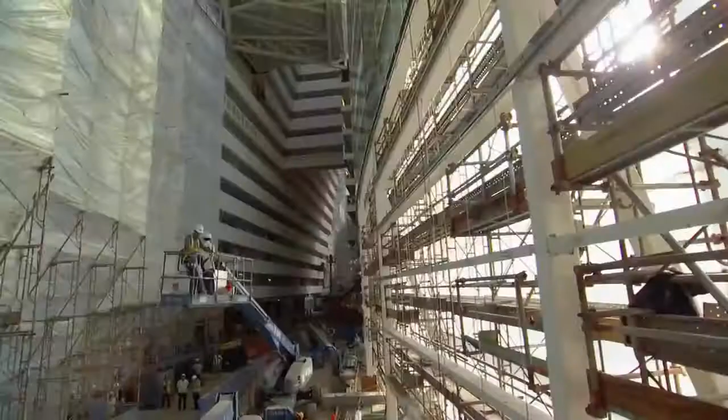Right now, I'm going to take you behind the scenes of one of the largest construction projects in all of Asia. Singapore is reinventing itself. This small island nation is attempting to finish one of the most audacious buildings on the planet. It's the country's first casino, 3 skyscrapers, covering 9 million square feet, and topped off by an engineering masterpiece.

The first ever Sky Park, longer than 3 football fields, with gardens, swimming pools, and restaurants, all higher than the Seattle Space Needle. We're actually in the pool right now. This is the view from the pool. Wow, it's pretty spectacular. That is amazing.

To finish it, crews must perform some of the highest and heaviest lifts ever attempted. You're putting a piece of steelwork the size of an aircraft carrier on top of 3 towers. Tackle one of the largest paint jobs on the planet. You would never do this in America. And erect one of the longest cantilevers in the world, 200 feet out over nothing. Oh my God, that's enormous.

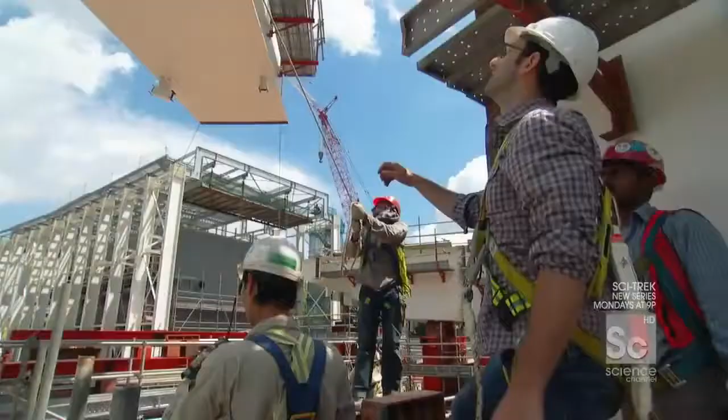I'm in Singapore, a tiny island nation with less than 5 million residents. In fact, the entire country is smaller than all of New York City. Located at the southern tip of the Malay Peninsula in Southeast Asia, the main island of Singapore is both a city and a country, one of the most densely populated in the world.

Culturally speaking, it's a somewhat strict and buttoned-up environment. Chewing gum is against the law. Insensitive behavior is punishable by fine. And if you're caught vandalizing a building, you quite literally get hit with a stick.

But despite this conservative cultural backdrop, Singapore is attempting to reinvent its image by doing something totally surprising. They're going to open a massive casino.

With no natural resources of its own, Singapore is risking $5.5 billion in hopes of cashing in on the gambling boom exploding across Asia.

It's a pretty significant gamble, because for Singapore, you've never had gaming before at this scale. You've never had a resort at this scale. You're taking a kind of a major leap. Yes, it's certainly a transformational project for Singapore, where you hope to actually not just double, but triple the tourism receipts. That's big.

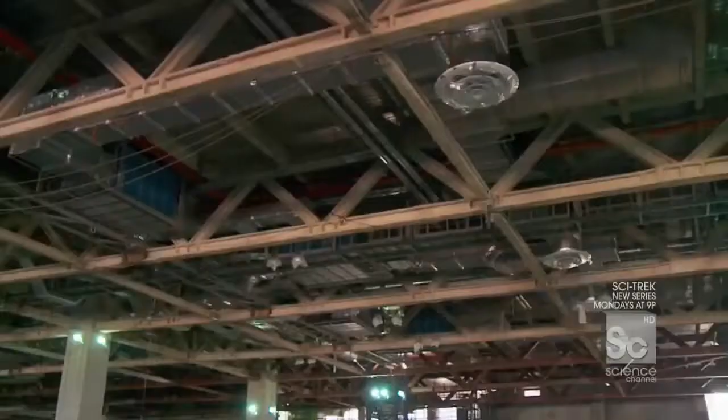The centerpiece of this giant transformation, the Marina Bay Sands, one of the biggest and most expensive casino complexes in the world. Unlike any hotel and casino ever built.

Rather than just being kind of a traditional hotel and casino that we might find in Vegas, instead we have a museum, you have theaters, you have retail, you have a casino, massive convention center, 3 incredible hotels, and all of that capped by the first ever Sky Park. That is absolutely right. The Sky Park on the very top will become the icon of Singapore, we think.

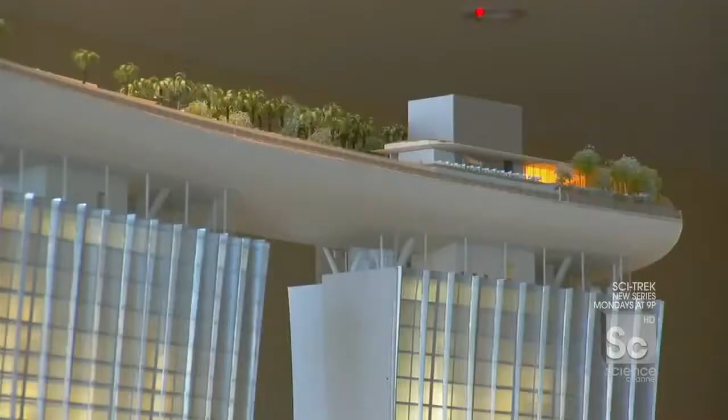In a move that has never been done before, world-famous architect Moshe Safdie put a park across the top of 3 massive skyscrapers. An 1,100-foot-long urban oasis with tropical gardens and one of the longest swimming pools on Earth, all of it perched 55 stories above the ground.

So, Brendan, how do you describe a Sky Park to people? I mean, it's just a fantastic structure. I've never seen anything like it. There's 3 55-story towers, and you're putting a piece of steelwork the size of an aircraft carrier on top of it. So it's quite a feat.

And there's a park up there. There is. Well, there's more than that. There's observation decks and swimming pools and restaurants and all sorts of things. So it'll be a little city in itself.

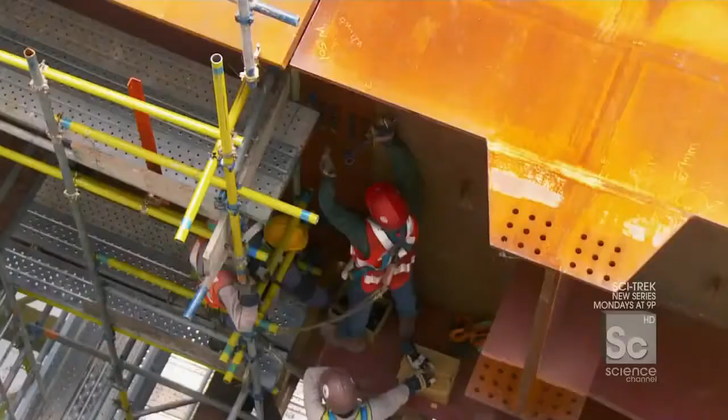The biggest challenge for builders: lifting 7,000 tons of steel, which is more than the main span of the Brooklyn Bridge, on top of 3 650-foot-tall buildings.

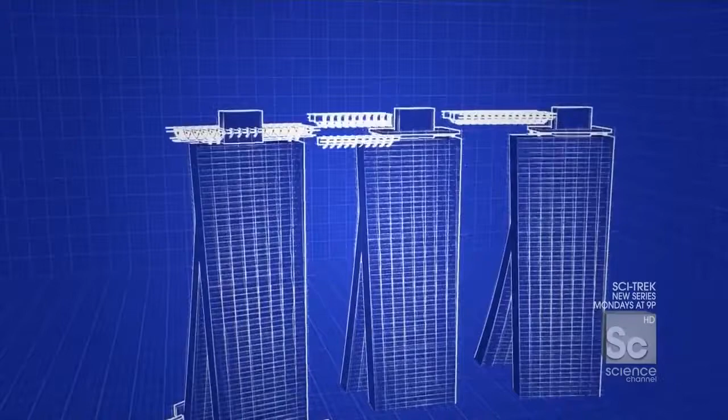To get it up there, the team divided the structure into 14 large but more manageable segments. 6 form the bridges connecting the towers, and the other 8 make up the observation deck, which sticks out 218 feet from the end.

And right now, crews are about to lift the second to last bridge segment, a massive 350-ton piece that will hang between towers 2 and 3.

It's a little after 7 p.m., and on most job sites, it'd be quitting time, right? Folks would be going home. But here in Singapore, we're about to begin one of the most critical lifts in the entire project.

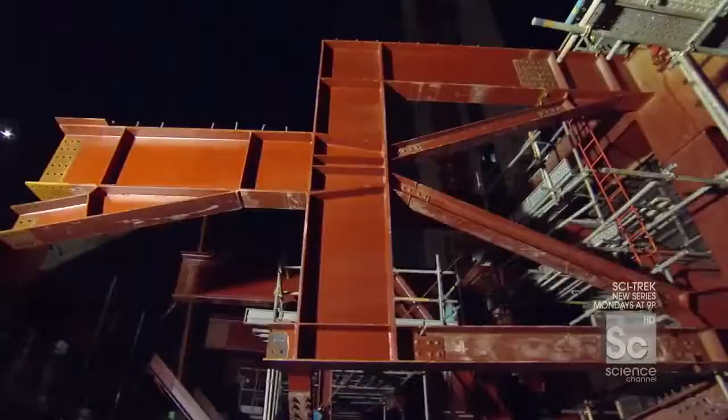That bridge segment right there, an over 350-ton chunk of steel, is about to get lifted up over 650 feet in the air.

This sounds crazy, right? We're actually taking a bridge, lifting it up, and putting it on top of 2 skyscrapers. This has never been done. You've got to be a little bit nervous to get this thing up. Oh, definitely. We have to get it right.

Lifting this piece will take some of the strongest hoisting cables ever designed. They get attached to the very top of the segment, 5 stories up.

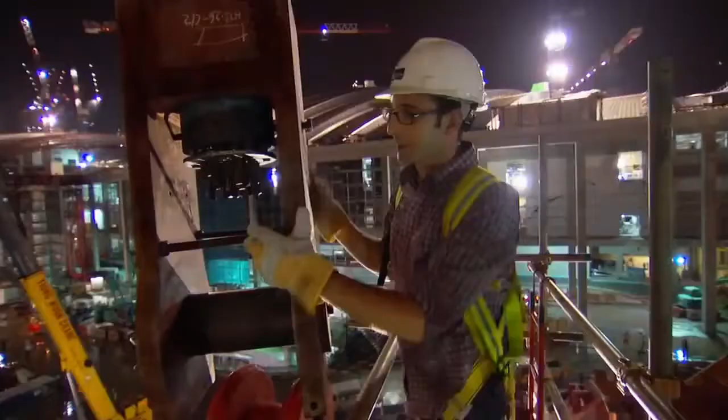Now, at long last, I'm on top of the whole bridge segment, and you really get a sense of its length, because it spans all the way between 2 full towers, over 150 feet long. This is what it's all about. This is the shackle coming down, over 600 feet up. Look at the amount of bound cables inside of this thing, just the density. There are 2 of these shackles, one on this side, one on that side. We're going to lift up over 350 tons of steel.

All right, call the man upstairs. An operator from the top of the Sky Park lowers the shackle down. There she comes, there it is, here it is.

960 millimeters. It has to line up within 1/10 of an inch for this 150-pound anchor pin to fit through. Oh no, I'm stuck. Push, fight, come on, shake it a little bit. Hammer! Give it to me. You ready? Here I come.

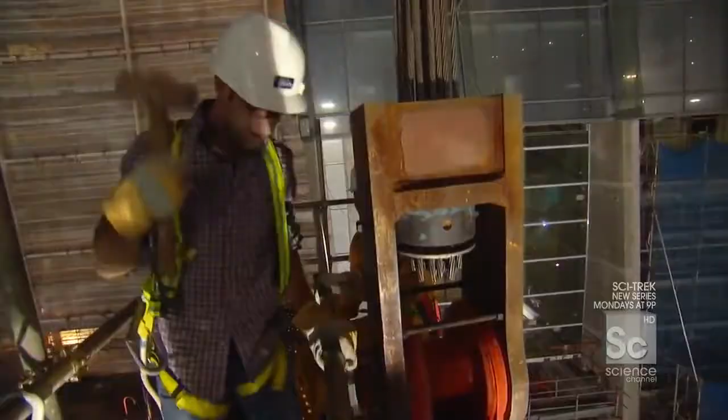Once the pins are pounded into place and the shackles are connected, there is one final step to make sure that the load is secure. Overnight, crews test the connections for 12 hours by hanging the segment just 4 inches above the support. If everything looks good, it is ready to go up.

Okay, she's floating, 4 inches off the ground. Ready for the lift? Yes.

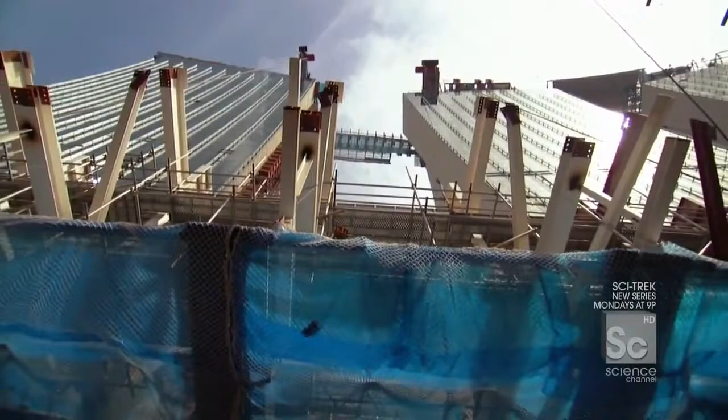How's the wind? If you can see it, it is swinging, and if it swings, it might hit the building. So when the lift begins, the concern is in a strong wind, like a pendulum, it could move and actually hit the building. It's that close to the building. It is very close. Because of the curvature of the towers, this piece must pass within 10 feet of 2 glass skyscrapers on its way up. Any wind over 5 miles per hour is enough to call off the lift.

So are we good? Are we ready? Yeah, good. So it's now okay to go.

Typically, crews would use tower cranes for heavy lifts, but this segment far exceeds their capacity. So instead, engineers are borrowing the technology from a different kind of construction: bridge building. Even the most powerful tower crane can lift about 20 tons. This thing weighs over 360 — not an option. So they went with something called a strand jack.

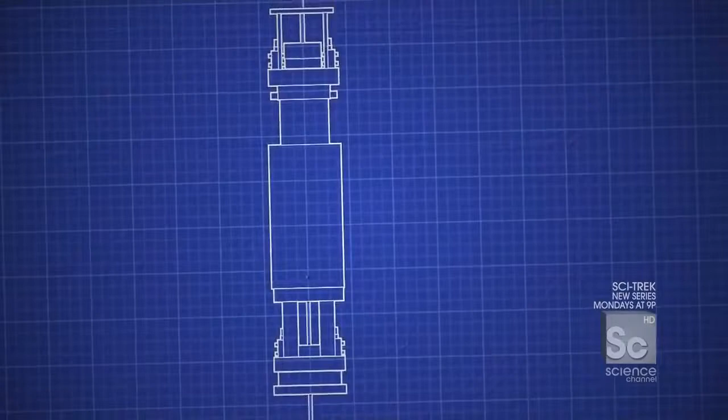To understand how it works, imagine 2 hands or clamps holding a rope. One hand locks the rope, the other brings the rope up, grabs the rope, goes back for more, brings up more rope, and so on. Strand jacks work on simple hydraulics. A bundle of 22 half-inch diameter cables passes through 2 clamps. The top clamp grips the strands and moves up almost 2 feet. Then the bottom clamp locks the cables in place while the top moves back down for the next pull-up.

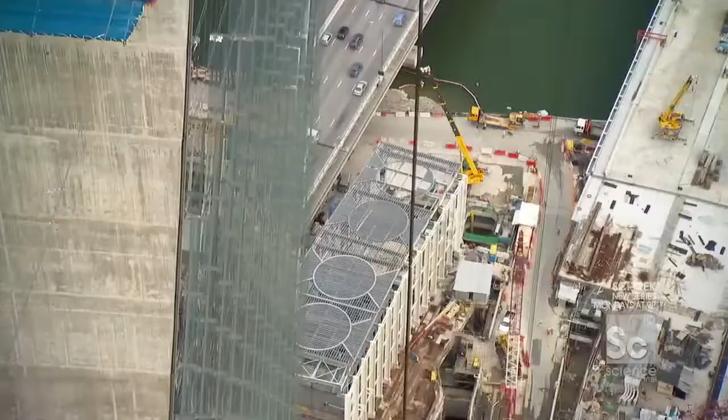It takes 2 enormous strand jacks to lift this segment, one on each tower. Combined, they could lift the Statue of Liberty. It's the first time this technology has been used to make lifts this heavy from the top of a skyscraper.

Tony? Danny. Welcome, Danny. Good to meet you. Good to meet you. Tony, where am I standing right now?

Well, you're on the Sky Park, so this is kind of where the action is. This is where the pool is — right where we are now is the second swimming pool. We're actually in the pool right now. This is the view from the pool. Oh my God, people will be able to swim out to the edge of the pool. And literally, there'll be no edge — it'll be an infinity edge looking out over Singapore. Wow, it's pretty spectacular. That is amazing.

And what's making all of this happen is this really nasty-looking beam. That's right — this enormous frame is supporting the strand jacking units. Now, can we actually head up top to the strand jack? Yeah, we can. Let's go this way.

The strand jack sits on a temporary support structure that extends 30 feet out from the side of the tower. So, Tony, where we're walking right now, we're actually leaving the skyscraper below us and now heading out. We've just walked off the edge of the building.

Beyond. So we're now standing perched out. There's no more skyscraper below us right now. There's no building below us.

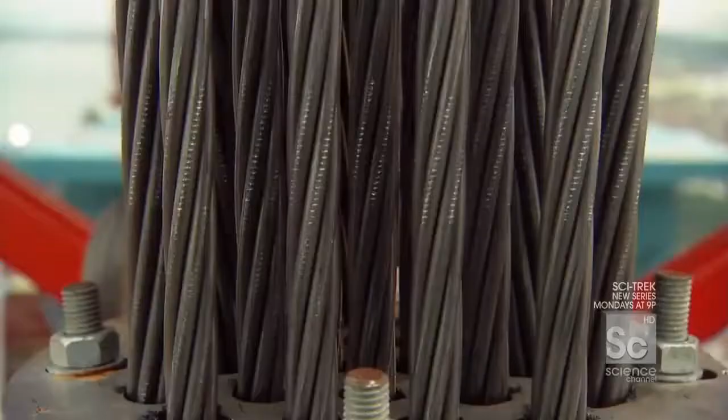It's awkward. It takes almost 30,000 feet of cables to raise the segment, enough to cross the width of Manhattan. And if any of them get tangled, workers cannot lower the piece back down. So one of the most critical jobs on the site falls to the cable manning crew here at the highest point of the Sky Park.

Okay, so I am now standing at the very top of the strand jack. And you know that because right here, this is it. This is the top of the cables. And what we're about to do, every 30 strokes, they stop everything, clamp the lift, and spray some lubricant inside to make sure everything moves real freely. Unfortunately, I'm getting tasked with that role right now, so what do you got, some WD-40 we're doing this with? Look at this guy. Why is this the most low-tech thing in the world?

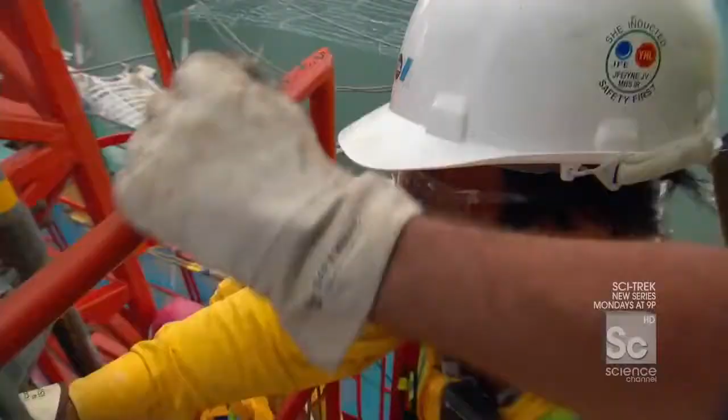Okay, so now what we've done is we've taken the collar off, we've lowered the jack down, now we've exposed the cables to give us good access for some good greasing. Okay, Romley, how do you grease it up? Spray and pull out. Put in, spray, pull out. Go in, spray, pull out.

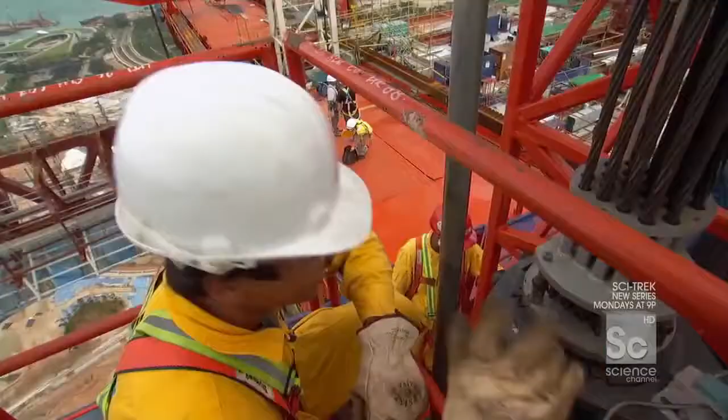You know, it's sort of humbling to have to climb up to this point, to have that behind you, to have to take a spray can like this, stick in, spray, pull out. Stick in, spray, pull out. Go in. These guys have to grease these cables once every hour for the entire night to get this segment up the final 500 feet to the very top of the Sky Park.

Coming up: a one-of-a-kind solution to fight Singapore's intense sun puts up a fight of its own. I'm gonna pull you right outside of the basket.

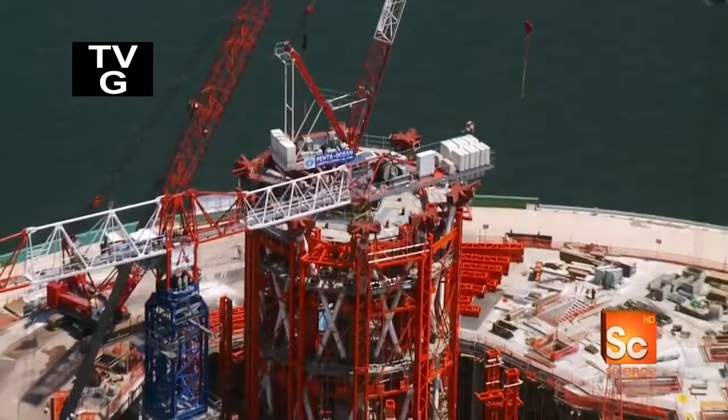Singapore is just 26 miles long. And with literally nowhere else to expand, this tiny island is increasing its footprint by actually filling in the sea, creating almost 1,000 acres of land on which to build an entirely new downtown.

So tell me something, if I was standing here 5 years ago, what would I have seen there? Well, 5 years ago, you wouldn't see the floating gallery, you wouldn't see the wheel, you wouldn't see Marina Bay Sands, neither would you see the financial center. So this is a radically different skyline in just 5 years' time.

Yes. Singapore's evolution involved 30 years of land reclamation, followed by 5 years of construction, all culminating with the Marina Bay Sands. So 5 years ago, this would have been called the old downtown of Singapore. Yeah. And now with the Marina Bay Sands completed, this becomes the new downtown. Yes, absolutely.

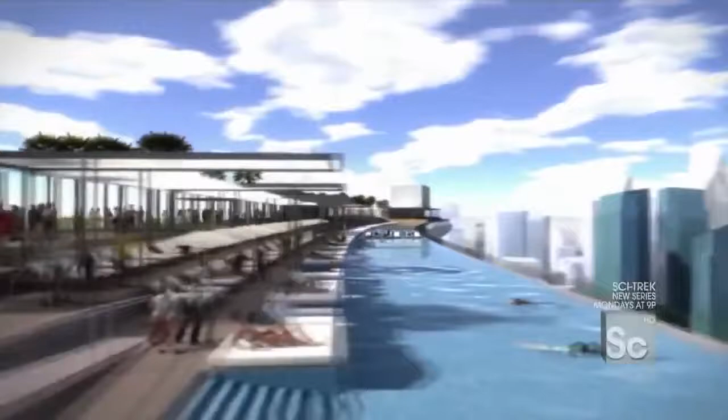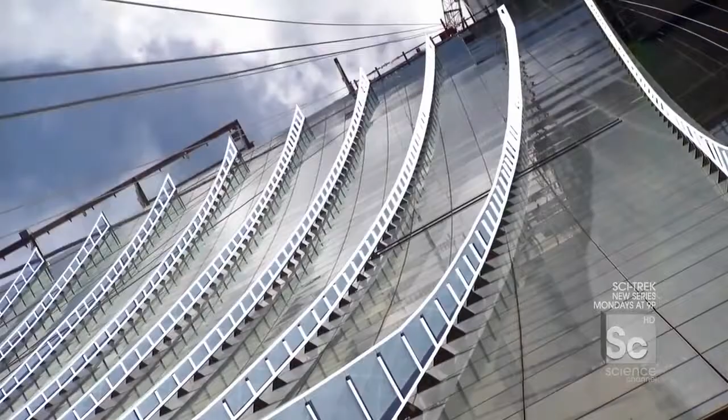The Marina Bay Sands' 3 hotel towers will offer guests phenomenal views of Singapore's new downtown. But they also had to be a stunning centerpiece for the city's redevelopment. So, to define their curved silhouette, the architect clad the tower facades with 1,900 glass fins, which also perform a key functional role for the building. The western face of the towers gets the most intense afternoon sun, so when the light hits the fins, they actually deflect the sun's rays, casting a shadow that reduces the heat on the hotel rooms by 20%, while still enabling clear views of the bay.

But this distinctive design feature is also one of the most difficult to install. I think today is gonna be one of those days where I go and do something that I kind of think I shouldn't do, but in the name of really understanding how it is they build this building, we're gonna do it anyway. I'm gonna take you in a gondola up the side of a building, almost 600 feet to install glass fins.

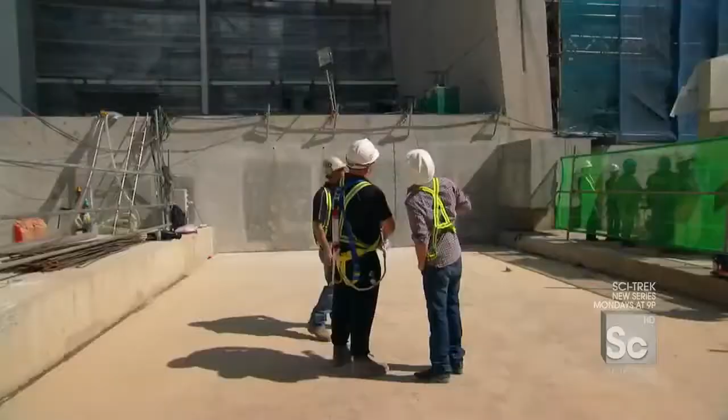And the guys who are going to help me do it are right here. Terry? Hi, Danny. Good to see you. David, how are you? Danny, good. Not bad. What are we up to, fellas? We're actually going up to the top. Basically, we're going to install the last fins to Tower 1. And these fins are actually hanging perpendicular from the facade of the building. That's correct.

Each fin is 10 feet tall and weighs 400 pounds. They're hung in straight vertical lines, protruding up to 4 feet from the side of the tower. Because the facade actually curves outward 5 degrees at the top, there would not be enough clearance for the Sky Park lift to pass by. So 12 fins in the upper corners of each tower were left off until now.

So this is it. We are closing up the curtain wall of Tower 1. Yes. Big milestone. Big milestone. All right. Take me over to my maker. Let's do this. Okay. No problem. Lead the way.

Terry's crew installed the fins from a 6-foot-long gondola hanging off the side of the building. You gotta be kidding me. It's basically the size of a bathtub, swinging from 2 sets of 650-foot-long cables tied to the tower.

Just gonna hang some glass with my boy Jay, 600 feet in the air. Right, man? Give me some skin. Buddy, we're gonna be great.

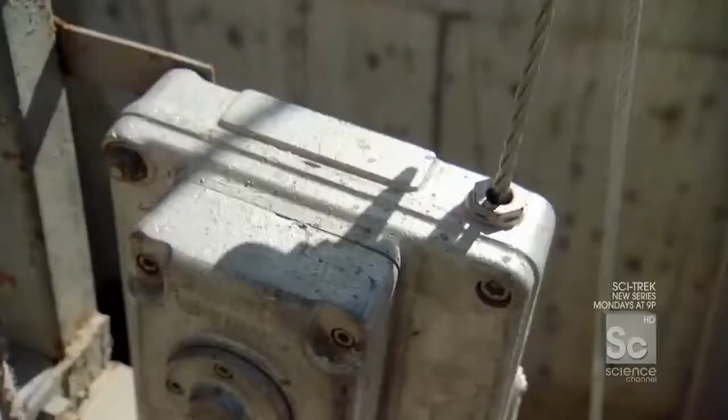Here we go. The gondola travels at just 0.2 miles per hour. Here I come, moving along, just moving along. So it'll take me more than half an hour to reach the top.

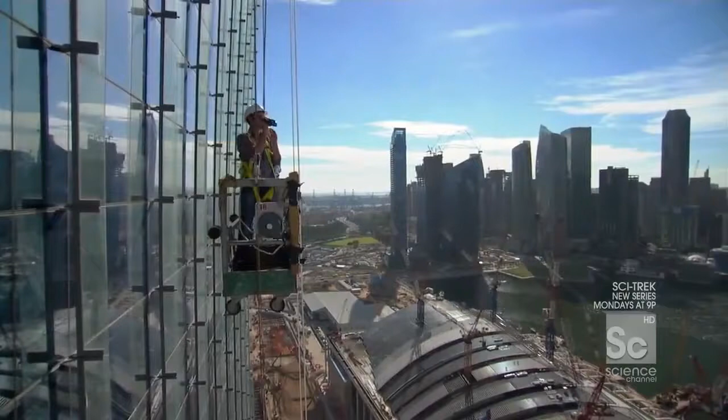Oh my God, this gondola looks like it was built by the Unabomber. I don't really feel like I give you exactly what's going on for me right now, so I want to give you just a little taste of what I'm seeing. There is a fantastic view of Singapore. There is Jay, my chatty friend. And there is not a good situation.

All right, we're almost near the top, and you can tell because the building is beginning to bend back on itself and get closer to me. Right there, check it out, we're about 80 feet from the top of the building, and you can see, if you look up, the missing glass panel.

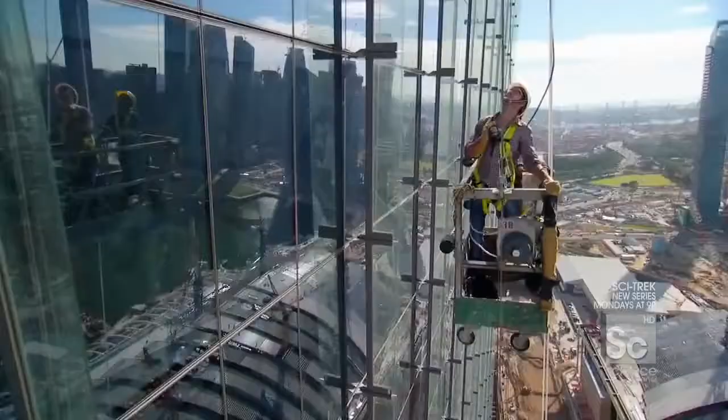As I approach the top of the skyscraper, they're prepping the glass. There she is. Oh, the wind is really moving up here. That looks safe. Hey, fellas! How are you? Nice weather, huh? This is something you don't see every day. I'm outside a skyscraper, and right here, right now, I am touching the top of the building. We are on top of the skyscraper.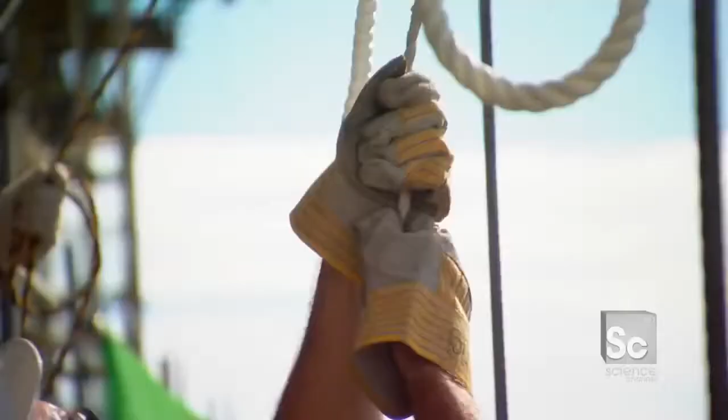All right, who's ready to install some fins? Each fin is a custom-built pane of solid glass. I've got the line, hang on. On a calm day, they are extremely difficult to manage.

The wind is blowing this thing out. Give me a hand. But on a day with even a light wind, the task is almost impossible. Hang on, you feel like it's gonna pull you right outside of the basket. Hang on, give me some help. I'm not kidding, every time you get a little gust of wind, I can feel my feet getting cold a little bit. There she is, slowing down.

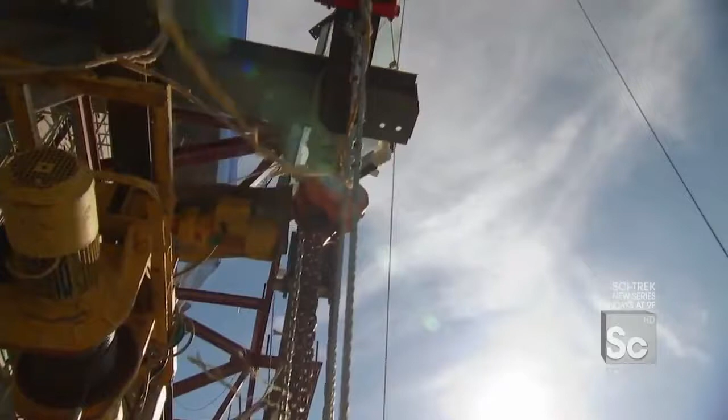It's basically like a big double laminated glass sail, and if the wind catches it, it moves. Okay, let it come down a little bit more. The fin can swing up to 20 feet while attached to the tower crane. Coming this way? Okay, watch out, someone help him! That's just too dangerous for the final installation.

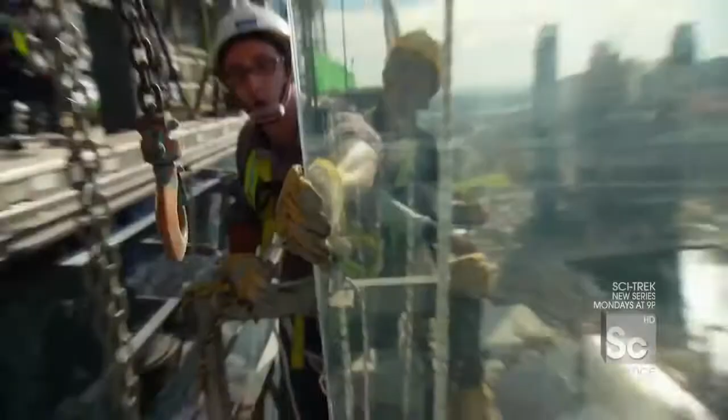So the team has to transfer it to a more precise chain block mid-air. Whoa, hold that side, please. All right, so this is it. What we're doing right now is essentially taking the load from the crane and transferring it to that chain block. Are we in? Okay, I think we're set.

This is another one of those moments in my life where I say to myself as an architect, did you really need the fins? Did you have to have fins? The building would have been fine, you know?

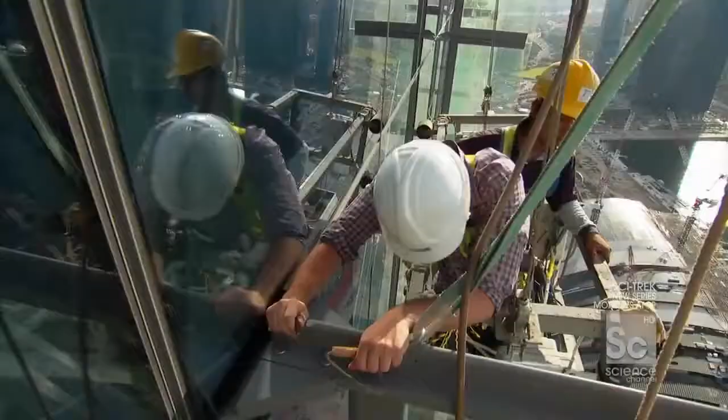Okay, gondola down. The fins are designed to clip into each other at the bottom. Need you now, Jay. But here, at the very top connection on the highest fin, oh boy, this is gonna be a nasty one, it gets locked to the building with bolts.

Okay, Jay. 4 bolts. Give me your thoughts. 1, 2, 3, 4, are we good? Okay, are we good? Come here, bring it in, I need some. Give me, come on, give me it, babe. I need some, there it is. Okay, that's right. Whew, 4 bolts, locked in, lined up.

We, Jay, are done. Can we go home? Home. Home, that much he understands. Let's get out of here.

Up next, building one of the longest and highest cantilevers in the world, jutting out more than 200 feet over nothing. Oh my God, that's enormous.

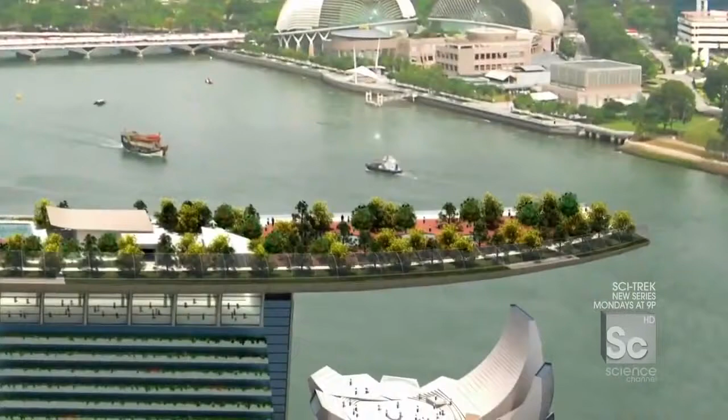Singapore's new Sky Park is the first of its kind, a steel structure longer than an aircraft carrier, on top of 3 skyscrapers taller than the Seattle Space Needle. On the northern end, the architect took this innovation one step further, creating the longest cantilevered observation deck in the world. It's the biggest and heaviest section of the Sky Park, and it hangs out 200 feet over thin air.

When it's done, the Sky Park will look like one 1,100-foot-long continuous element. But the reality is, it's made up of 2 very different structural conditions: bridges on one hand, and something called a cantilever on the other. Spanning between towers 1 and 2, and towers 2 and 3, are 2 bridges, basically acting like tabletops. The force goes from the bridge, transfers into the towers, and down shear walls into the foundation.

Now, the cantilever is a different story. A cantilever, by definition, is a load supported on only one side. So what you have here is a 218-foot-long span, almost like a diving board, perched out over nothing. Intuitively, that load wants to just twist off the building. So to keep it down, they've put not 1, but 2 700-ton backspans holding down the cantilever. The 2 backspans weigh as much as a fully loaded freight train.

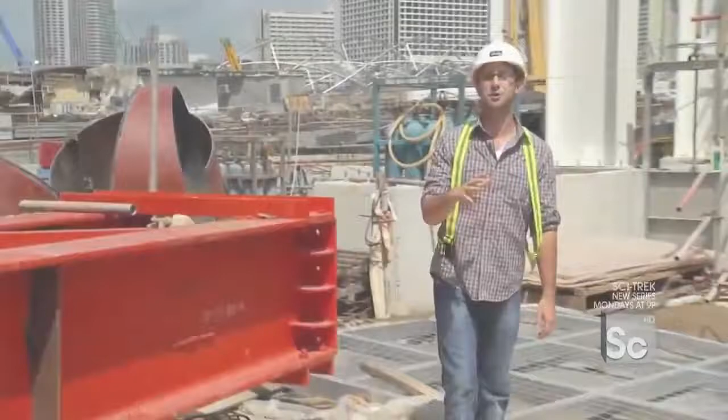That weight is critical to balancing out the cantilever, which will jut out longer than a 747 from the end of Tower 3. There are 860 tons of structural steel that make up the 218-foot-long enormous cantilever. It is so big that they actually assemble the entire unit here on the ground before sending it all the way up there.

The cantilever is just too big to be raised in one single lift. Instead, it's divided into 6 segments. Once they're 650 feet in the air, crews will have just 1 shot to fit them together. So before the segments can be lifted, they're assembled on the ground to be sure that each connection will fit perfectly.

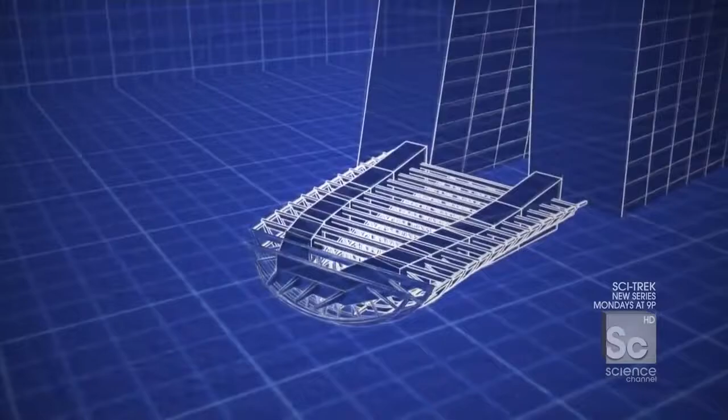These pieces behind me represent the very final pieces of the cantilever to be assembled here on the ground. Once we get this and this bolted onto that massive cantilever, the lifts can begin.

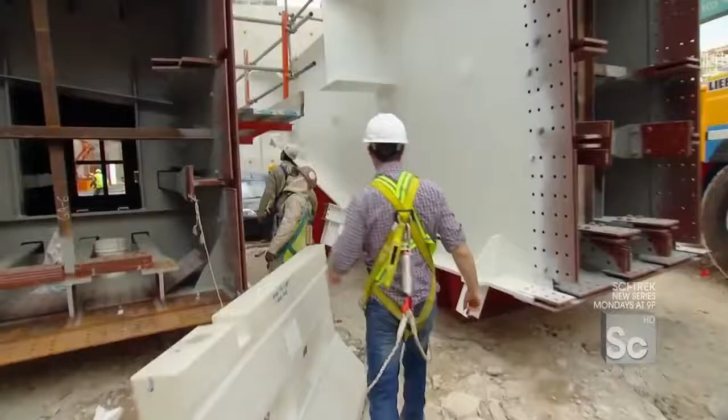The crane's now setting the shackles up. We're going to go on top of the piece to connect it. The piece we're attaching today is 12 feet tall and weighs 30 tons, as much as 2 Mack trucks. A crane will lift it over to the rest of the cantilever using 4 extra-large shackles.

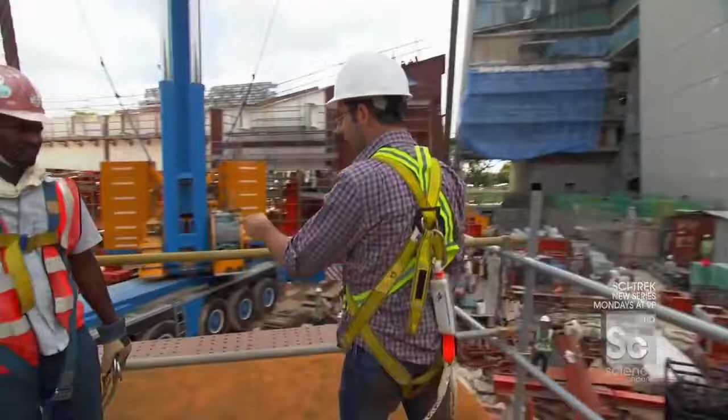Viram's now tightening up this shackle. Shackle number 1, 2, 3, and 4 are all connected. The next step is to take the piece I'm standing on, lift it up, and extend that cantilever another 50 feet.

You ready? Knuckles! All right. You ready, Knuckle Man? Knuckle Monster, you got it. Nux Magoo, come over here for that. Bang! We are ready to go. Okay, I'm ready.

What they've done is put a bit of tension in the line, lift the piece just off the ground to make sure the shackles look right, and confirm where the center of gravity is. Are we good? Are we ready? Yeah, all right, let's go. She's off, out of our hands. Now the crane's got her. He's going to swing her all the way around this way.

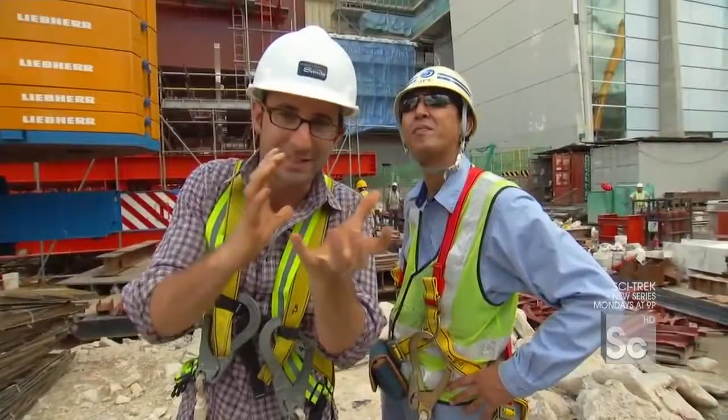What's really worth noting is as you look at this massive floating piece of steel, it's not but a small fraction of the entire cantilever that's going up there. Even with 1.5 million pounds of steel, this cantilever will still be susceptible to the problem facing all structures: movement.

All buildings, all bridges, even all cantilevers have a natural frequency, meaning they move ever so slightly. If the movement of wind, or even the movement of people, starts to align with that building's movement, it can combine and literally shake a building. So when the engineers were designing the cantilever, they had to be concerned with not just how many people stood on the edge, but also how they were moving.

This cantilever has been designed to withstand wind and earthquakes, but its most dangerous threat could come at the hands of a DJ. Yeah, it's thousands of tons of structure up there, so you and me jumping about, it's not going to do very much. But if you get 100 or 200 people all jumping up and down at the same frequency, it can actually excite the cantilever and you start to feel it.

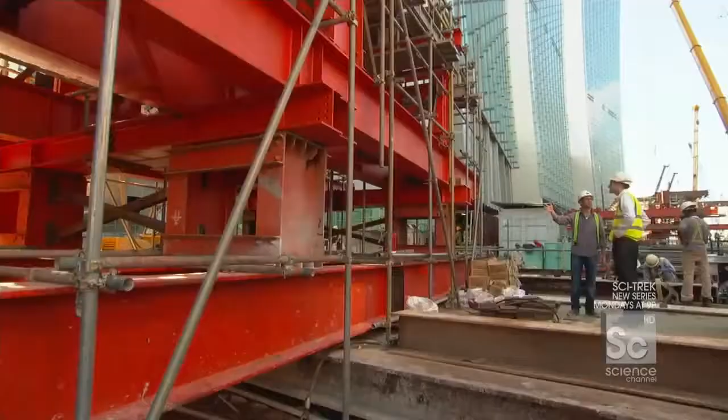It would take hundreds of people dancing to the exact same motion, like the Macarena. And believe it or not, our dynamics engineers have iPods with thousands of songs in them that have the frequencies of all these songs. So once we find out what the frequency is, in theory, you can say you can dance the Macarena, but you can't dance the bus stop.

That can't be true. Is that true? Yeah, that's right. So you're telling me some engineer is doing intense load calculations and figuring out that this thing can take the electric slide, but it cannot take the achy breaky heart? And they know that in advance, and it's been designed for. More or less, yeah. Imagine the party's going great, a big wedding, and all of a sudden someone puts on the Macarena and it's like, no!

Now that the piece has made its way over to the rest of the cantilever, the next major challenge is lining this giant segment up for attachment. The piece is now literally sitting right on top of my head. Just imagine, on top of this incredible long piece of steel will soon be a garden, a pool, and a dance party.

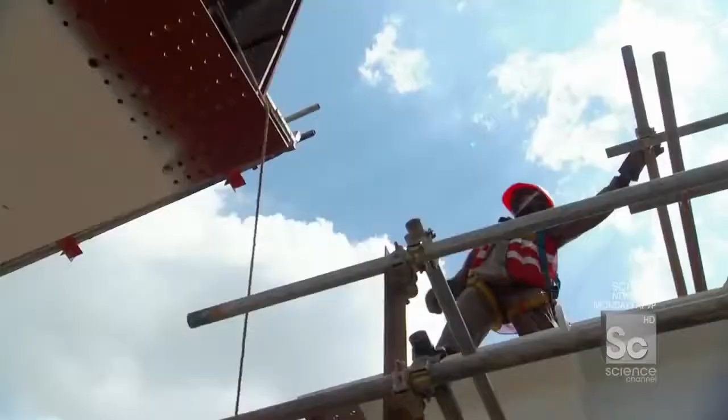Slowly got it down. Something incredible about lifts like these is that the first 99% happens almost instantly, and now it gets down to the details—pushing it, pulling it a matter of inches, to get all these holes lined up, to get the bolts in, and take the load off the crane.

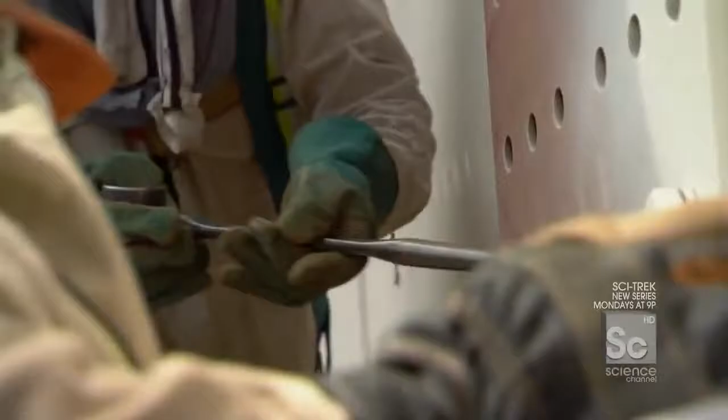Once the piece is in place, the crews have to line up all 1,500 bolt holes. There are so many bolt holes. They'll connect about a third of them here on the ground to make sure everything fits together before liftoff, because there are no second chances once this piece is airborne. So this is how one fits into the next piece right here—you have these two plates on top, and they're sliding over the previous cantilever piece.

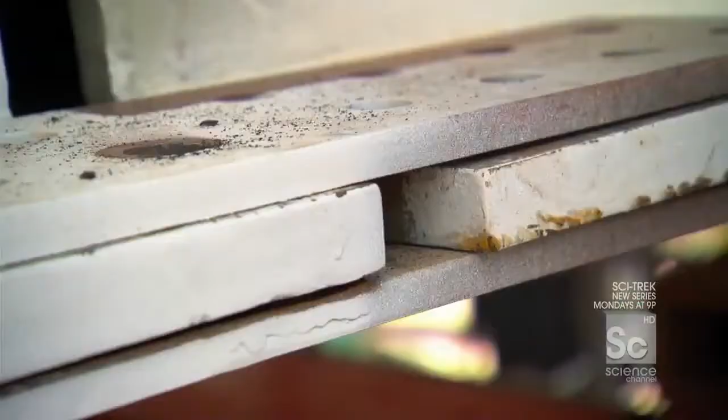Here it is, it's coming in, it's coming in. Once she's there, we'll put this pin in to lock the piece together so we can release the crane and move on. About 2 inches. Just about there, just about there. Okay? Yeah, use the hammer. The pin secures this new piece to the rest of the cantilever so bolting can begin.

Man, I never do that. Usually I break a finger and knock some steel off the thing and almost break the hammer most of the time. I knocked the crap out of that thing.

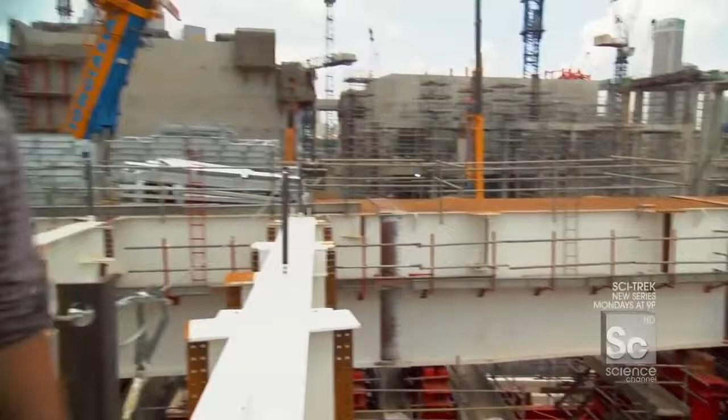As you can see, the piece is in its final location. Now from where I'm standing, I think you can really get what this thing is—an 860-ton, 218-foot-long steel diving board that's going to be perched out over 600 feet in the air.

And coming up, a hotel like no other, with a lobby bigger than a cruise ship wrapped in glass. This is probably one of the most spectacular corridors I've ever seen.

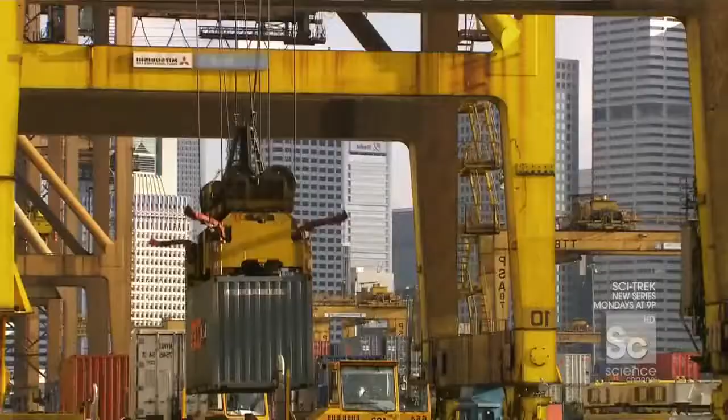Singapore is the gateway to Southeast Asia, and for the past century its economy has depended on its location as one of the world's busiest shipping ports. But this city is in the midst of a makeover. When the Marina Bay Sands opens later this year, Singapore will instantly become one of the largest gaming markets in the world, putting it in the same league as Las Vegas, Atlantic City, and Macau.

When Macau opened their casinos, they looked to the past for inspiration—you have the Venetian in Las Vegas, you have the Venetian in Macau, a carbon copy, only bigger. But here in Singapore, a country so focused on image, they didn't want to mimic what came before; instead, they're trying to literally reinvent the idea of a hotel casino. The difference comes down to design. The typical casino model involves a giant gaming floor with a flashy attraction out front and a hotel connected in the back. But with the Marina Bay Sands, the architect separated the hotel from the casino and relocated the attraction on top in the form of a sky park.

From my perspective, when I think of a hotel and casino, I think of a ginormous casino, a tall hotel in the back, and basically not being able to check in and go to my room without passing a blackjack table or a slot machine. This doesn't follow that model. Singapore has a very particular vision as to how they want the gaming component to work. What we built here was not something that was casino focused, it was all of this. So the casino is part of something far grander. Key to making that happen is not just building a set of normal, typical expected structures, but instead to do something like that.

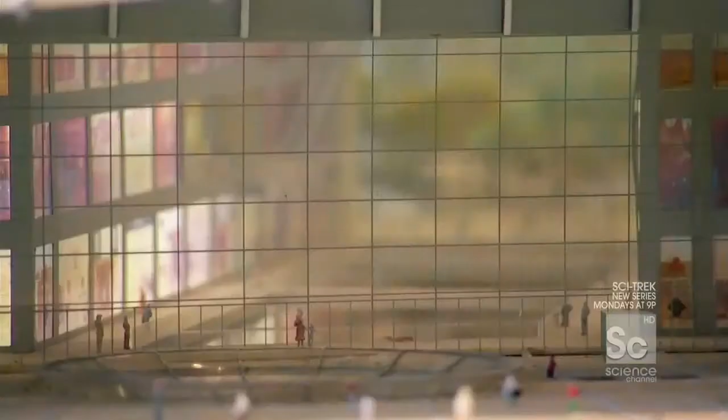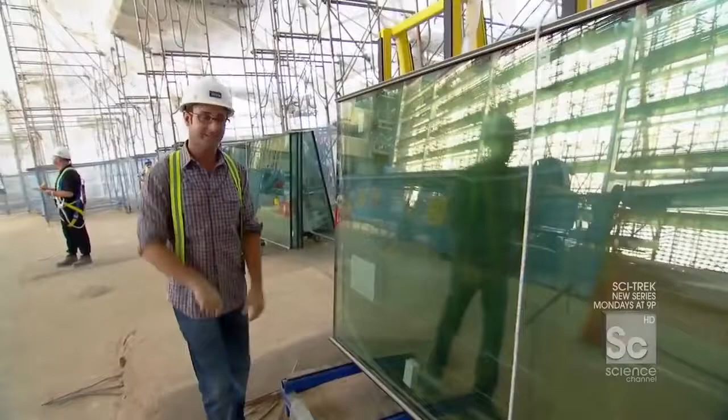This revolutionary design carries over to the hotel towers themselves. To create a hotel lobby like nothing before, the architect split each building apart for the bottom floors, creating one long tapered space linking the three separate towers together. The three hotel towers are all connected by one long continuous atrium, covered in glass, with massive 9-foot-long panels being installed. 3,500 individual panels will hang throughout the atrium, transforming this space into one 850-foot-long tube of daylight.

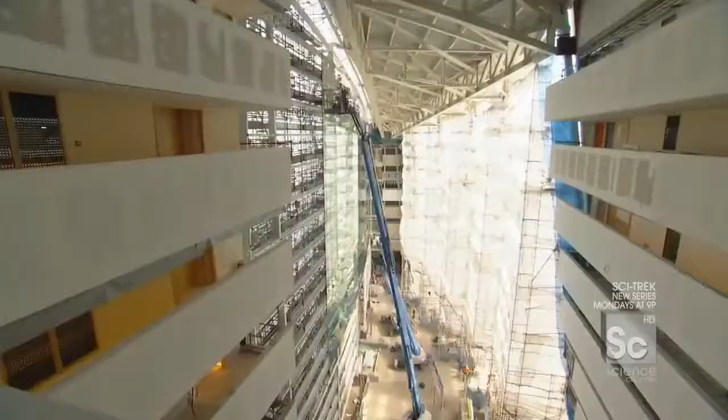So Terry, once the scaffolding comes down behind that glass, this whole chamber is going to be just awash in light. Yes, that's correct. And these spaces literally link all three hotel towers and let you look from one end of the building all the way down to the far end. So this is more than just a connective hallway from one hotel to the next. It's not just a corridor. No, and if it is, it's probably one of the most spectacular corridors I've ever seen.

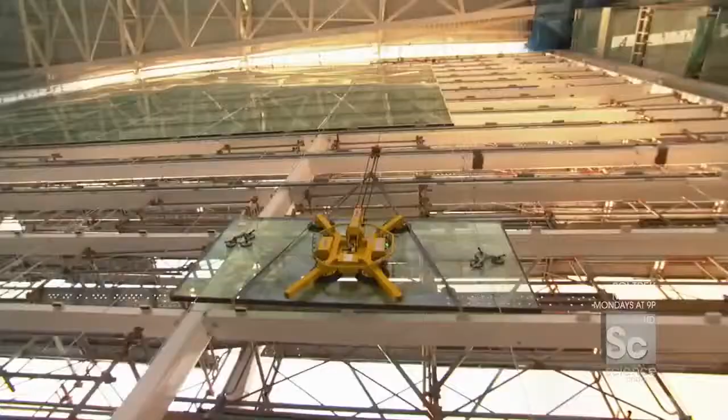Correct. The atrium glass is a key part of the tower design, but it also plays an important functional role in sealing up the building. With hotel guests arriving in just 6 months, the delicate job of hanging all that glass needs to happen quickly. Why is it so important to get the glass on the atrium and button up the facade? The vital bit is we have to make the building watertight as quickly as possible to enable all the final finishes to commence on the inside. So all the sheetrocking, carpeting, wallpaper, painting, that sort of stuff can't happen if moisture can still penetrate the building.

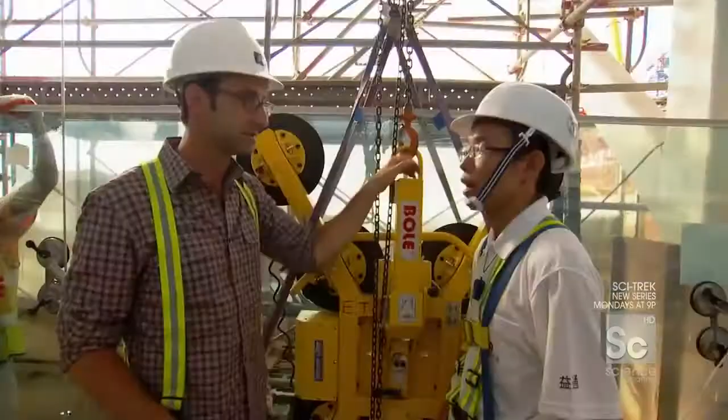Let's do it, Wy. We're installing the 3rd highest panel in this section of the atrium, more than 100 feet from the ground. Safety harness? I want you to be safe the whole time. In addition to Wy and me, it'll take 10 other workers to install this 550-pound panel.

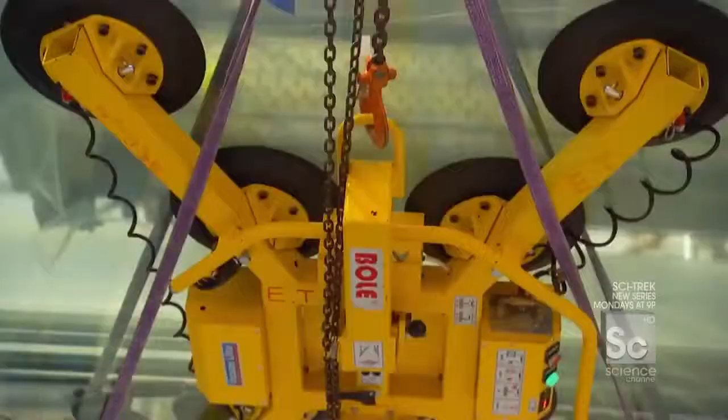The crew on the ground applies suction cups to the glass and then sends it up on an electric hoist to meet the crew in the air. Here it comes, check it out. And waiting for me, hello my brothers! You guys ready to rock and roll with myself and Wy? The big team, this is it. This is the Singapore Glass Stallions. All right, here it comes. It's a big piece of glass, huh?

Wy, yes. What are we doing, what's the first step? The first step is we need to take off the handle. So I'll take off that side, you take off that side? Yeah, take off only the handle, turn only. All right, I don't want to drop it though. Don't want to drop it. Okay.

The panel is supported by a backup system of smaller suction cups to help guide the piece on its way.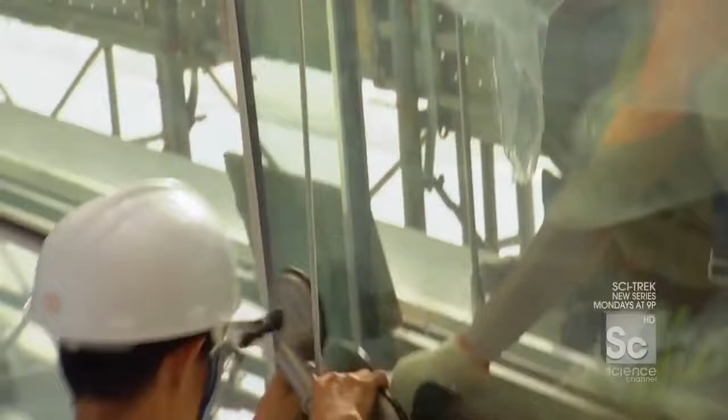Okay? Yeah, okay guys. It's okay, let go? No, it's too scary. I'm not gonna do it.

Okay, I did it. And just like the glass fins outside of the towers, we'll finish maneuvering this panel into place with the chain block. The chain block has lifted the glass panel to just about the height of the previous panel.

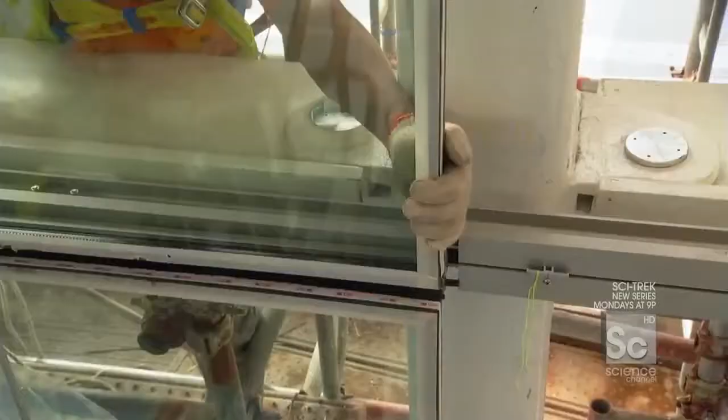So the next step is to push it in and get it locked into place on the brackets. The interior work for the hotel cannot get started until all the atrium glass is hung and the lobby is watertight.

To speed up that process, 20 attachment brackets come pre-installed on the atrium wall frame. They sit horizontally so the glass can slide into place, and then we'll turn them vertically to lock the panel to the building.

Do I need the screwdriver? No, you use the power tools. I'm old school, why, power tools. Make sure all the pressure bars are tight because the hand power is not standard. You haven't seen my hand power, why. Tight, yo. Check it, why, you don't trust me, check it. You have a look, that's good stuff.

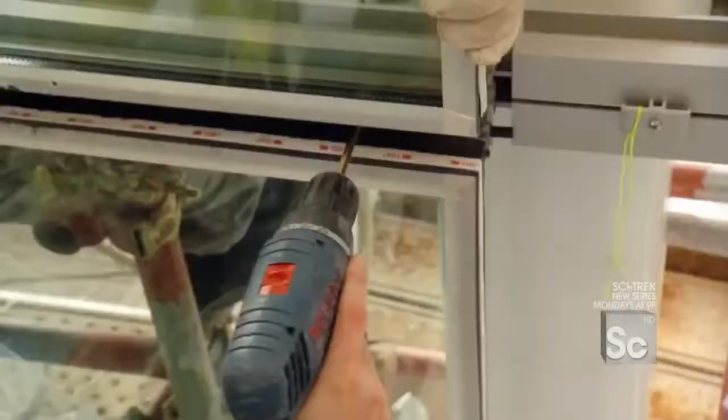All right, so all 4 sides are locked into place, and this glass panel is now fully supported by the building.

So therefore, I'm pulling the plug. Suction is coming off. 3, 2, 1. Okay, all right, very nice.

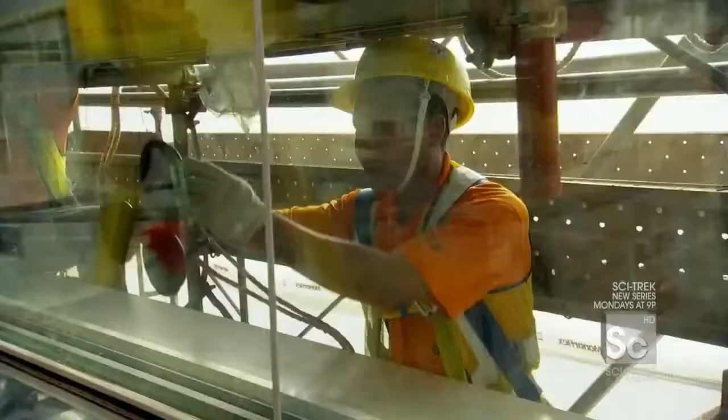Look at that, nice huh? Very nice. He's from Malaysia. Yeah, and his team does this 25 times a day. Best partner.

And in just 6 months' time, this entire atrium will be covered in glass and shimmering with natural daylight.

Okay, it's you and me. Go home, now go home. And by go home, I mean hang glass the rest of the day.

Up next, racing to finish one of the largest paint jobs in the world. We're gonna use a brush. Yeah, this brush, this brush.

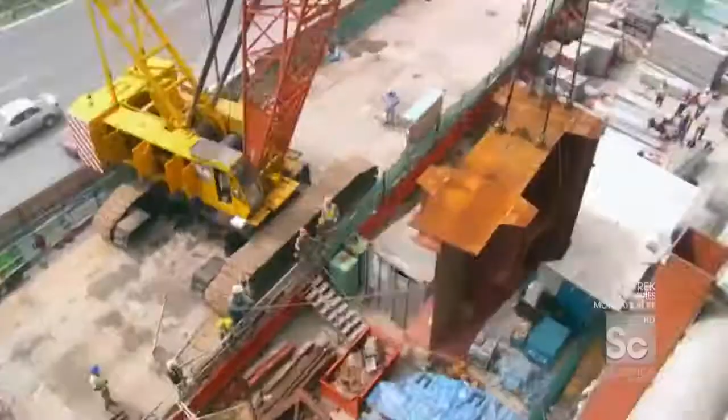After 30 years, Singapore's ambitious downtown redevelopment is nearly complete. Its crown jewel, the $5.5 billion Marina Bay Sands, is due to open in just 6 months, and crews are racing to complete the hotel's complex facade. The glass on the face of the towers is complete, but on the side walls, the concrete remains exposed. So to finish those walls on time, there's another massive job ahead.

When you clad the outside of a skyscraper, typically you cover it in maybe some stone veneer, maybe some glass, or maybe some metal paneling. What you don't do is you don't paint it, right? Because if you've ever painted a fence, every couple of years you have to repaint that fence. But here in Singapore, they're so focused on things being clean, so focused on the immaculate maintenance, they're willing to actually paint their buildings. So today, I'm going to do something that you would never see on an American construction site. I'm going to paint a skyscraper.

Crews will have to paint an area about the size of Mount Rushmore. Muti, I'm Danny. This is going to be one of the single largest paint jobs ever attempted.

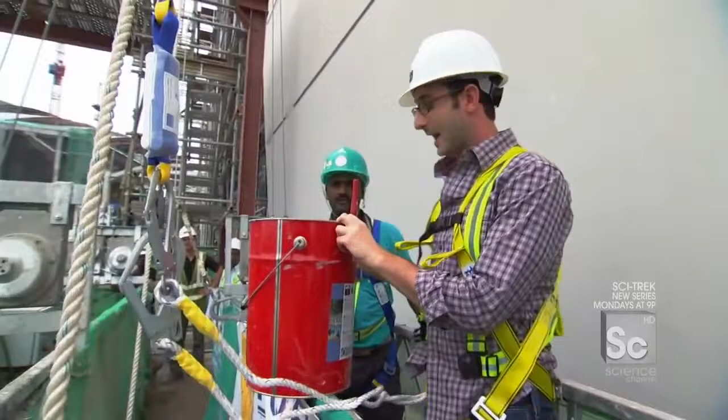So I've got a bucket of paint, and in order to apply the sophisticated skim coat with the technology we're going to use a paintbrush. Really, Muti? Yeah, this brush. It's a small brush, yeah? Yeah, small brush, one small brush.

Right, and obviously you couldn't do a skyscraper with that little brush, that'd be crazy. So instead, I have a roller, which ought to really expedite the process. Painting fast. All right, well what more do you need? Muti, yeah, away we go. Okay.

This wall faces the country's main highway, connecting the airport to downtown. So, Muti, you're okay? Heights, no problem? No problem, no problem. And on opening day, with all eyes on Singapore, it's gotta look good.

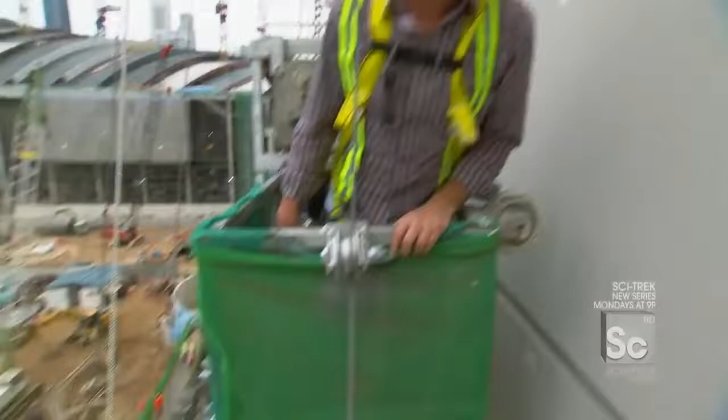Yeah, okay, so welcome to House Painting 101, Skyscraper Edition. We're about 200 or so feet in the air. We've reached our cruising altitude in a super, super robust and technologically sophisticated gondola system. And what we have to do is fix this, because this wall is a mess, right? Little holes that they've patched and filled. We have to have one smooth surface ready to be seen by all of Singapore.

Muti, start with the dark gray first, huh? Okay, first. I'm gonna paint within the lines here.

The dark gray lines mark each floor of the tower, so you can still see the floor-to-floor separation from afar, giving a sense of scale to this massive surface.

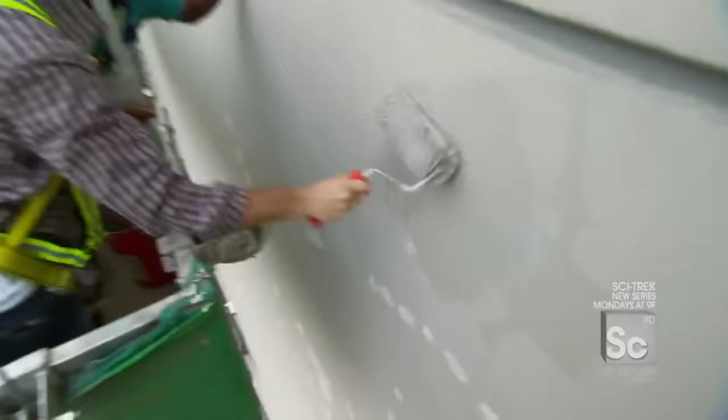Okay, so now that the gray line has been deepened and darkened, we're gonna start painting the building. Nice and gray. I like that Moody's looking over like I'm touching up the top of the Sistine Chapel or something. Moody, how's it look? Does it look good? Yeah, very nice, very nice. Good. Very nice, very nice.

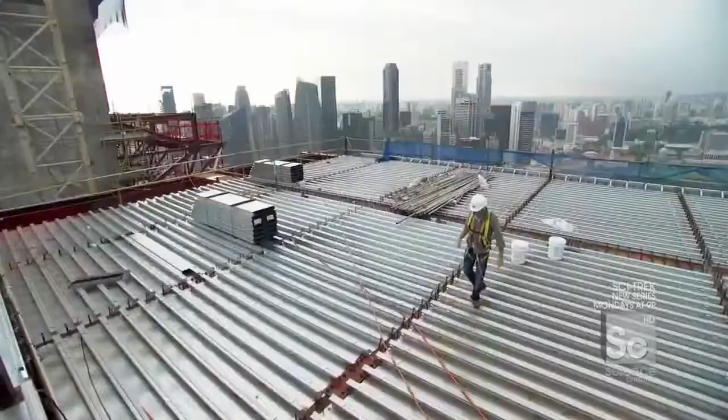But this is going to be a sprint to the finish, because crews up at the top of the Sky Park have only 6 months left to turn this mess of steel into the world's longest elevated pool deck. This is it. This will be the pool deck, and that will be the pool.

But there's a problem. I mean, there's a pretty big problem. You go on vacation, you come to the Sky Park, you see this amazing view of Singapore, and then you fall through a hole to your death. It's not good. Not good fun on the vacation.

So Wilson and I are going to cover it with this aluminum decking. Cover the holes? Let's cover the holes, my friend. We're filling in the bridge segments between towers 1 and 2, more than 650 feet up. And there is literally nothing below us but the decking we're about to lay.

Oh, I just got that thing. I just looked down and I saw a car, and it was so little, and my body was like, wait a minute, what are you doing up there?

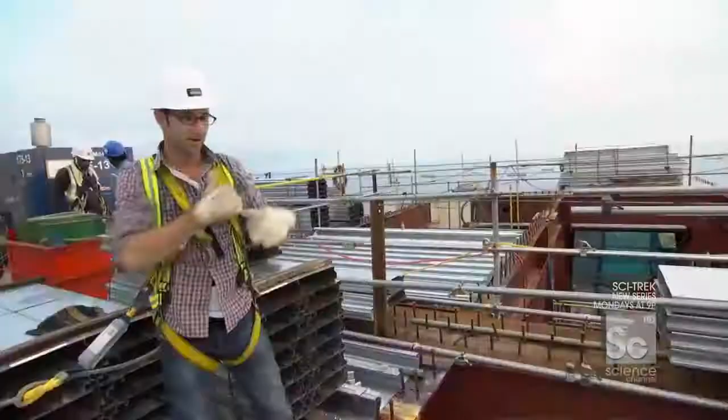All right, Wilson, how do we begin? Step 1? Okay, you ready? 1, 2, 3. Okay, and slot in. Pull back, pull back. Good. Put the clip on. Nice. Wilson, next piece, plugging up the hole. Dear God. Okay, letting go.

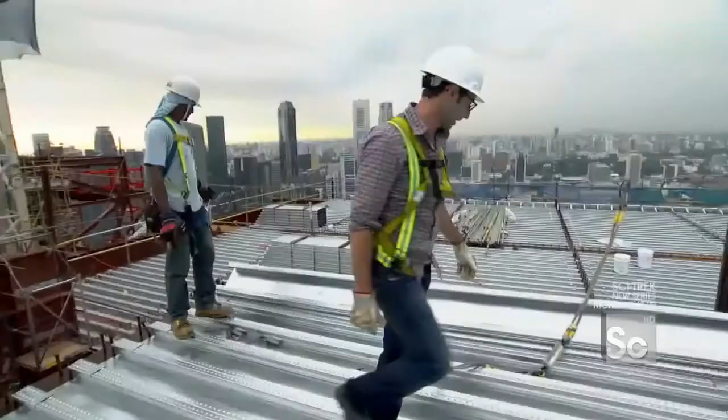With these 10 panels in place, another 125 square foot section of this Sky Park deck is complete.

Last piece, huh? Wilson and the rest of the crew will have to lay down 300 panels a day in order to have the entire Sky Park ready for opening day. Victory!

Wilson, when the Sky Park is done, people will be swimming right there, dancing on that cantilever, having dinner in that restaurant. But we're not done yet, are we?

Come back in 6 months, check out this Sky Park. Me and Wilson will be having a cocktail and enjoying this ridiculous, incredible view. You're buying though, right? Yeah, correct. All right, cool. Wilson's buying, so it's all good.

When the Sky Park is complete and the Marina Bay Sands opens, Singapore will join the ranks of the world's top gaming destinations and fulfill a 3-decade-long quest to reinvent a nation.

You know, for me, the moment when a building actually becomes a piece of architecture is when it transcends its function. So think of the Empire State Building - it's not just about the people who work inside of it, but it's really about the spirit of New York City. The Marina Bay Sands is a project with a hotel, a convention center, and a casino. But in reality, the sum is greater than the individual parts. This is a project where an architect, an engineer, an owner, and a government have all come together to literally try and reinvent the face of a nation. And I think if you come back here in about a year's time, that postcard picture you take of Singapore is going to look a lot like that.